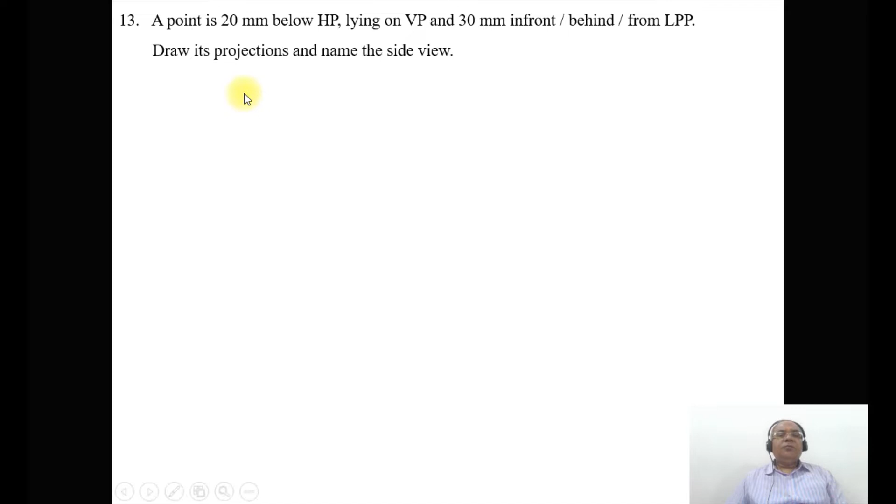Here what he says is that the point is 20 mm below HP and lying on VP. So since it is lying on VP, you have an ambiguity, whether it is in front of VP or behind VP. So that is the condition. But it is below HP. To analyze this, below HP, it will be there in the third quadrant as well as in the fourth quadrant. So this is how you can evaluate.

If you have below HP, the condition is in the third quadrant or it can be in the fourth quadrant. If it is behind VP, then it becomes the third quadrant. If it is in front of VP, then it becomes the fourth quadrant. Now we will try to analyze this problem by considering the third quadrant.

When you are taking the below HP condition, looking from the front view, you can see that the point is below HP by 20 mm, which is seen in the vertical plane. When you look from the front view, you can see that point directly 20 mm below HP. Since it is lying on VP, obviously that point has to lie on HP. So when you look from the top view, the point is lying on HP. So that is the point P.

And 30 mm in front or behind or from LPP. Since we are considering the third quadrant, obviously the point should be behind VP, so behind LPP. So we have to consider the left side view. When you are considering from the left side view, you can see below HP and also on VP. So obviously the point will be on HP now. The distance 30 mm behind LPP can be seen in both VP as well as in HP.

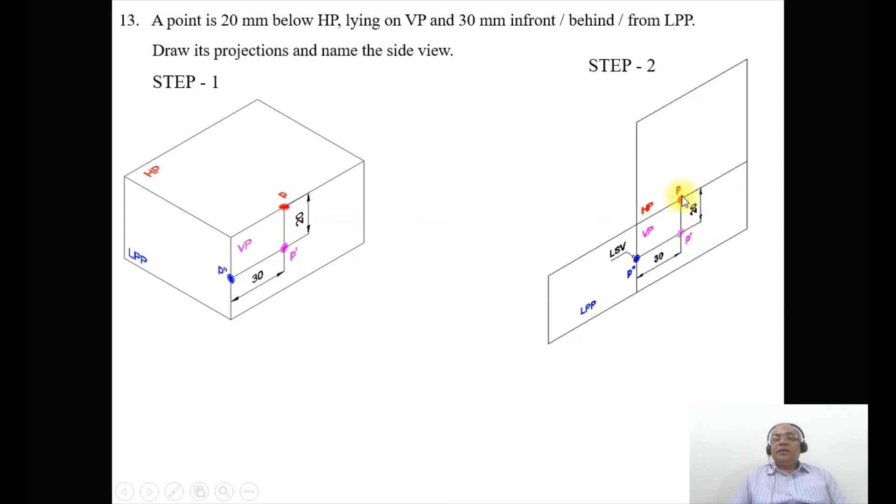So here the point small p is on VP, so obviously that point will be on HP. And 20 mm below HP is seen in the vertical plane, and 30 mm behind LPP. When you are projecting the top view, lying on VP, obviously that point will be on the x1y1 line. And when you project point P onto the origin and then bring it down, both the front view and the side view will lie on the same line. And since it is behind LPP, you are looking from the left side view, so that is the reason why you have LSV here.

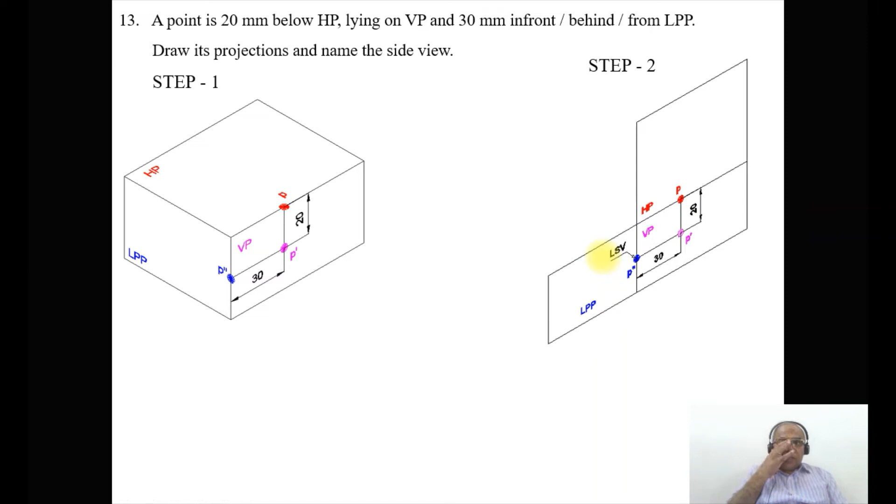Now, once we analyze this problem, we will try to solve this by using the sketchbook. First we are going to draw the XY line and the X1Y1 line and identify the quadrants. HP is above XY and VP is below XY. Since it is LPP, adjacent to VP, you are going to write LPP. As we see, the distance behind LPP is seen in both VP and HP. So from the X1Y1 line, you measure the distance of 30 mm and draw a vertical projector in the downward direction.

And 20 mm below HP is seen in VP. So from the XY line, you measure 20 mm and mark this point as small p dash. Since it is lying on VP, obviously that point has to be on HP. That is the reason why you are getting it on the XY line. When you are looking from the side view, obviously you can see both the top view as well as the front view.

So draw a horizontal projector from p dash to the x1y1 line, and through the origin, using the protractor, measure an angle of 45 degrees and draw an inclined line. Draw a horizontal projector from p to the origin, then project it down, and these two lines will intersect at this point. Mark that point as p double dash. Since it is behind LPP, the view you will get is the left side view.

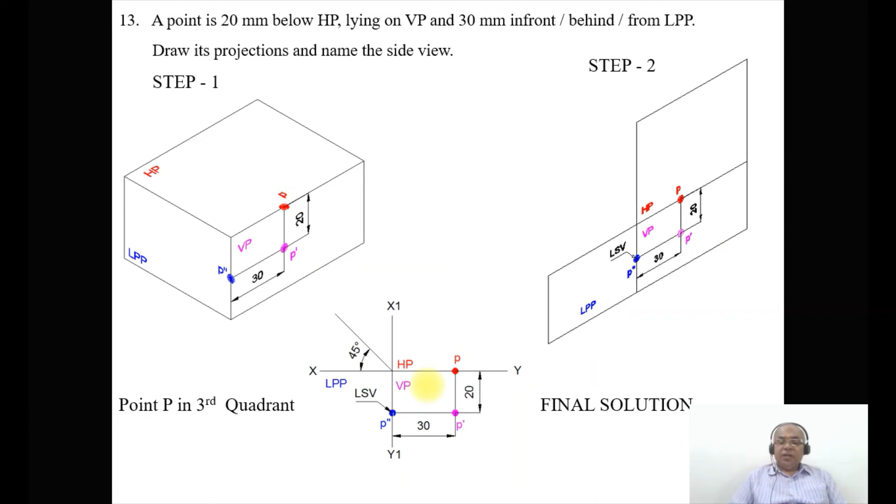So the point P, capital P, lies in the third quadrant. So that is how you are going to get this. Now we will try to analyze this problem by considering the fourth quadrant. When you are considering the fourth quadrant, the point is below HP and in front of VP.

Since it is below HP, when you look from the front view, you can see the distance below HP, 20 mm. Similarly, since it is lying on VP, that point should lie on HP. So you can see that point small p is lying on the horizontal plane. And since it is in the fourth quadrant, the point should be in front of VP. In front of VP means it should be in front of LPP. So I should look from the right side view, then the point will be in front. So it should be the right side view.

When you are projecting that, you draw a horizontal projector from P and also from P dash, and then through this origin you draw a vertical projector. Both these two lines will intersect at this point. You mark this as P double dash. And since it is the distance in front of LPP, the distance is seen in the vertical plane, as well as in the top view, that is HP. So when you cut this here and rotate HP down and LPP towards the left side, you will get this as the second position.

The distance in front of LPP is seen in both VP and HP. Since both VP and HP are below the XY line, from here you measure 30 mm and you will get this line. And then below HP is seen in VP. Since it is in VP, that point is the front view. So you mark that as P dash. Then you measure the distance, which is going to be 20 mm.

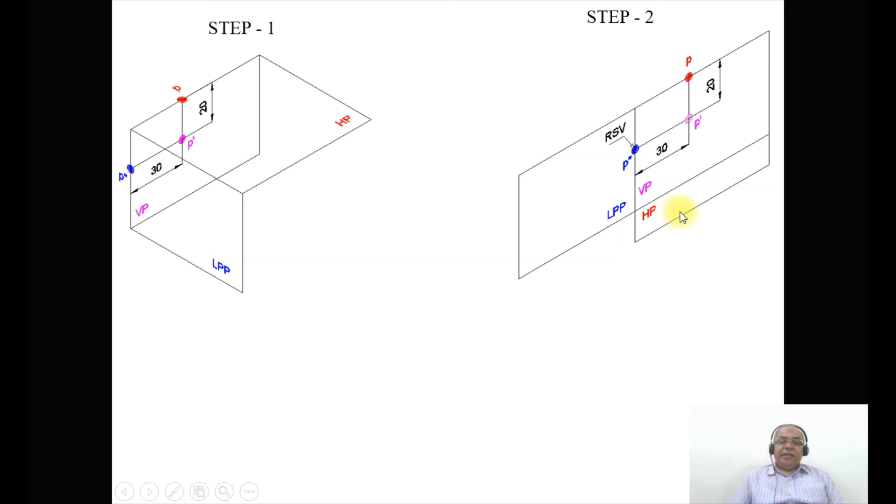Now we will try to solve the problem by using the sketchbook. First, we are going to draw an XY line, a little bit thicker than the projector line. Then identify the planes. Since it is LPP, you write below the XY line and to the left of X1 Y1, and VP and HP is the one which is being rotated. As we see, in front of LPP is seen in both VP and HP, so from the X1 Y1 line you measure the distance of 30 and draw a vertical projector which should be a very thin line.

Since it is 20 mm below HP, from this point you measure 20 mm, mark that point as P dash and give the dimension as 20. Since it is lying on VP, the point should lie on HP, so you mark that point as small p. In the side view you can see both the front view and the top view. So from the front view you draw a horizontal projector to the X1 Y1 line. Similarly from p, the top view, we draw a horizontal projector to the origin, then project down; both intersect at this point. You mark this point as P double dash, the right side view, and show the dimensions.

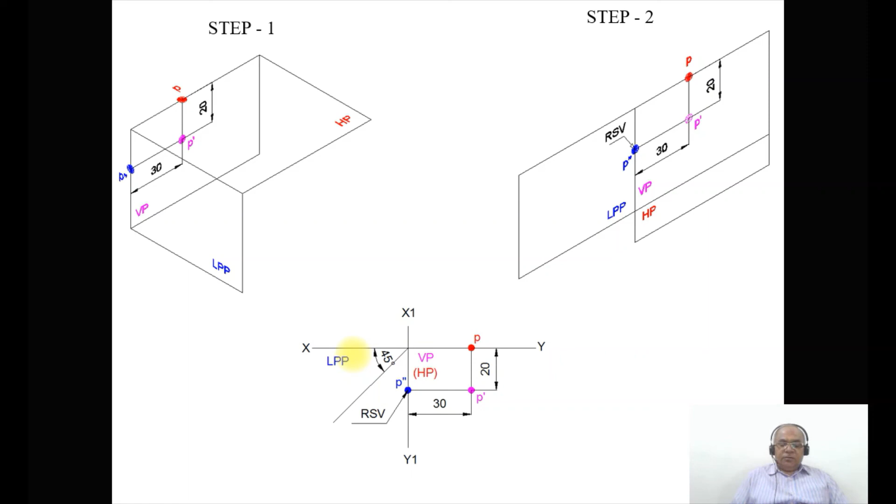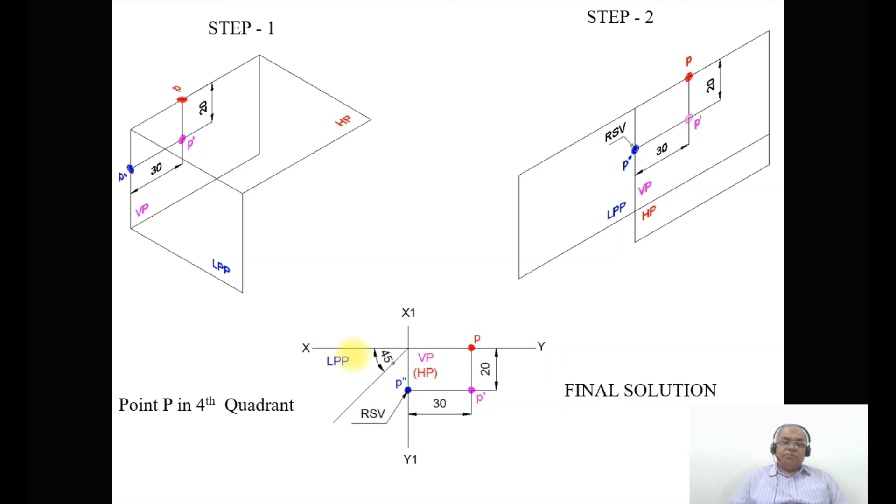So this is how you will be able to analyze and draw the solution in the sketchbook. Since the point P lies in the fourth quadrant, this is going to be the final solution. But if you get this type of problem in the examination, give only one solution. Either the point lies in the third quadrant or in the fourth quadrant. However, you need to write that the point P lies in the third as well as the fourth.

But in the third quadrant, the side view will be the left side view. In the fourth quadrant, the side view will be the right side view. So this is how you will be able to analyze this particular problem wherein the point is lying on VP.